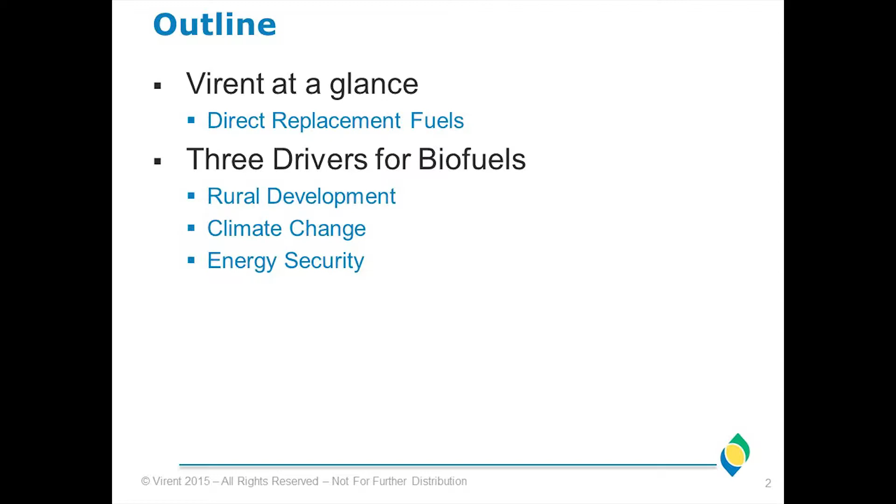Let's see if this works. So the outline for my talk: I just briefly want to give you an overview of what Virent is. It's a company that started in 2002. And then I want to talk about these three market drivers that we have for biofuels, which include rural development, climate change, as well as energy security.

Virent is based upon technology that I co-discovered with Jim Dumesic in the building right across the street here in the Department of Chemical Engineering. As I said, we started the company in 2002. As we were building the company, we were developing technology. We also developed a number of relationships, including relationships with Cargill on the feedstock point of view, Royal Dutch Shell on a product point of view. Honda was interested in what we could do on hydrogen as well as what we could do for generating fuels. And then I'll talk a little bit about work that we're doing with the Coca-Cola companies, more on the chemical side.

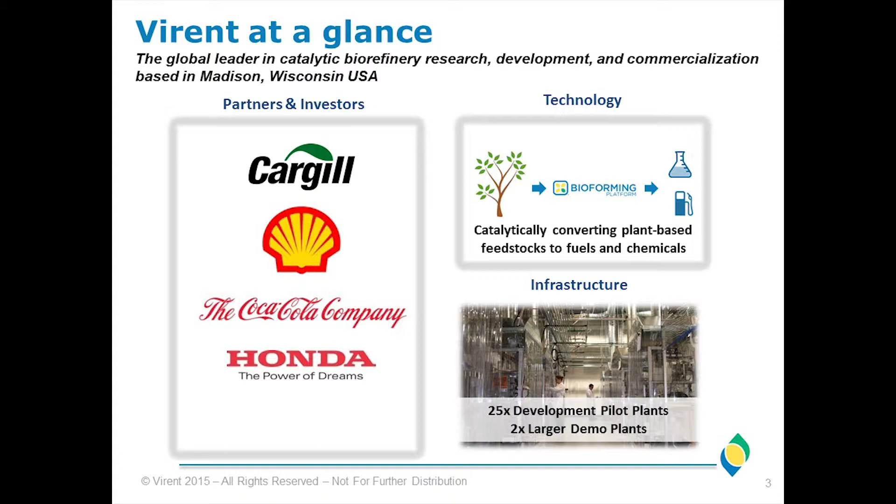We're located here in Madison, Wisconsin. We're over by the airport. We have a facility that's about 65,000 square feet. We have a number of pilot plants. We have what I consider a world-class lab for doing research and development of taking biomass-derived components and turning them into fuels and chemicals. The point I want to bring here is we are generating direct replacement fuels. We have a component that can be blended in to generate gasoline. I'll give you a little bit of a sense of what that is. Diesel as well as jet fuel. Let's see here.

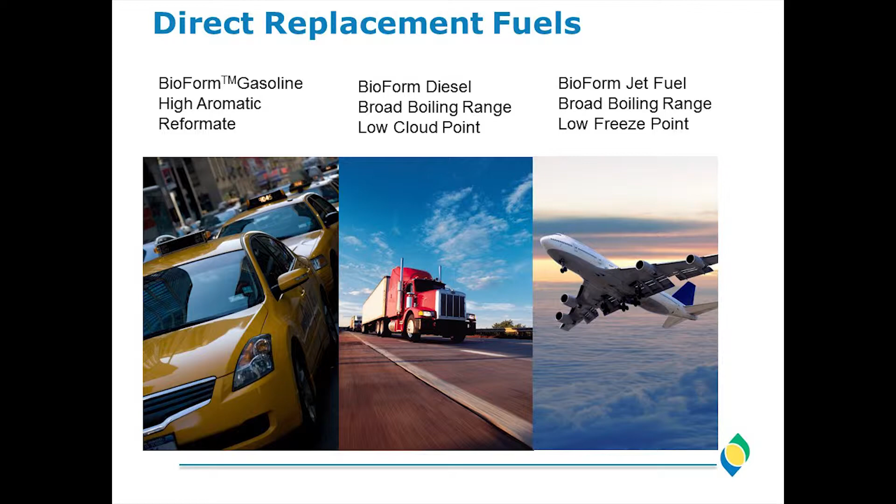Our process can utilize a broad range of feedstocks. We started out developing this using cane sugar as our feedstock, then we worked with corn with the work that we did with Cargill. We since have been doing quite a bit of work looking at different types of biomass, including residual wood waste, corn stover, as well as sugarcane bagasse. And we can run it through our catalytic process.

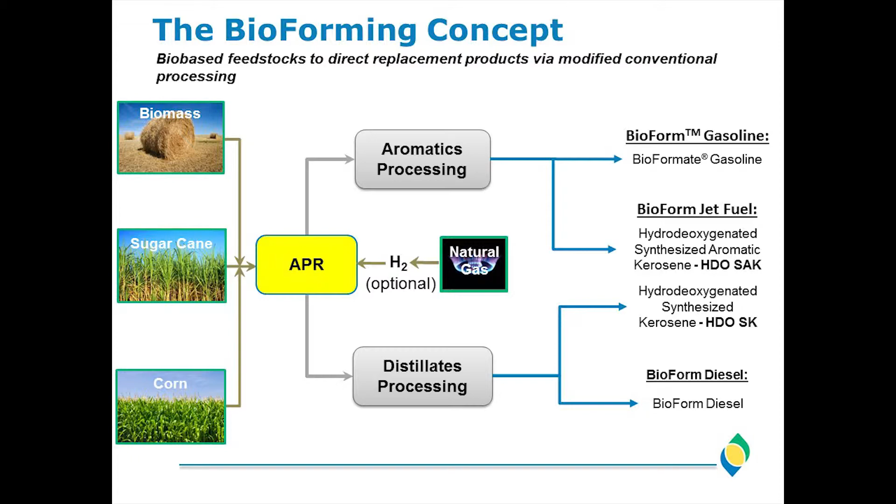The technology we discovered across the street is called aqueous phase reforming. That's the APR process. It can generate hydrogen, or we can bring hydrogen from the outside. So it's a way that we can utilize natural gas within our process. We have a couple of different processes where we can generate the components that you can put into gasoline. We can also put it into chemicals, or we can generate the components you find in jet fuel and diesel.

This just gives you a sense of what we can do on our gasoline. Within the oil refinery business, there's a stream that they blend into gasoline called reformate. We can essentially replicate the composition of that reformate. It's an aromatic-rich type of component. You can then blend it into gasoline to get the performance that you're looking for. The reformate that we generate has an octane of over 100, and it's something you can blend relatively easily into gasoline.

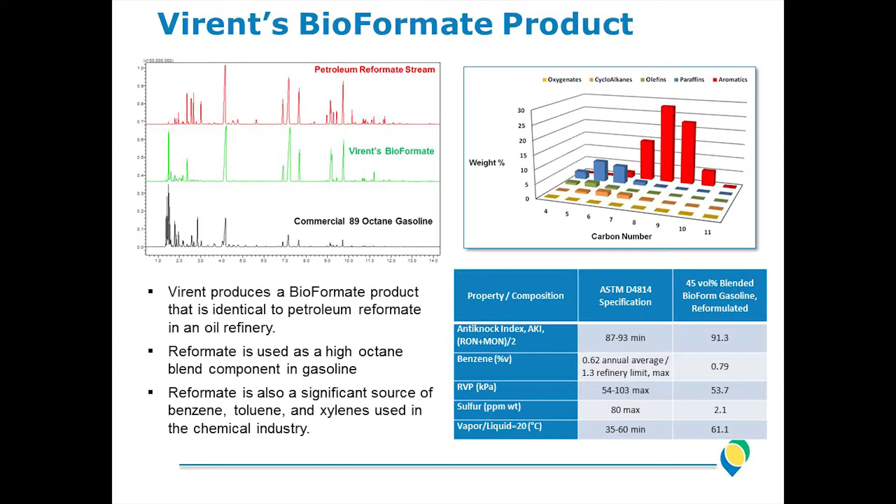Another thing you'll see me talk about is these components here. These are xylenes. These are things that can be separated and provide the components that companies such as Coca-Cola are interested in. We've taken this gasoline. We've been generating it. At Virent, we have been working with our partner Shell. They provide fuel to F1 racing for the Ferrari team. We've done several thousands of gallons for them, and Ferrari is using that fuel as a blend for their racing team here.

We also worked with Shell, where they have done fleet testing of our gasoline, doing no-harms testing. And this is work that was done in Great Britain. We actually have a couple of people here that went to school over here, and they also worked for a company that I worked with, UOP, at the time. They came and worked for the company as well.

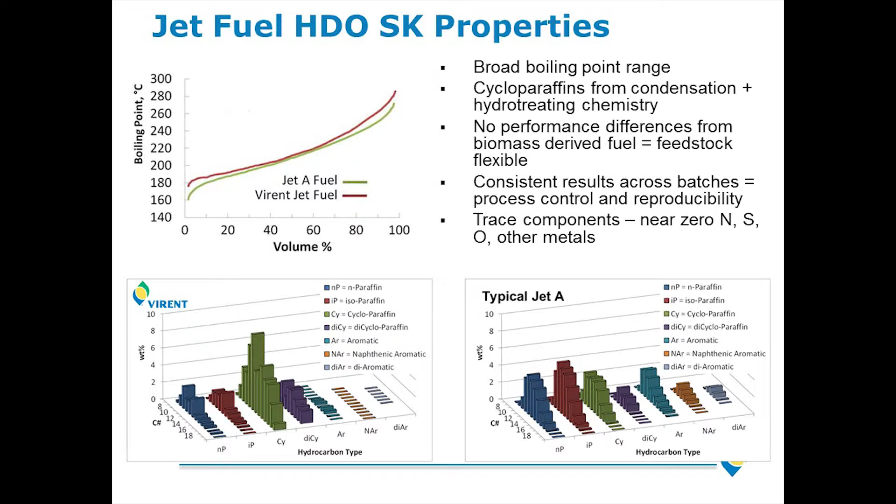The other thing about this is that we have very low contaminant level in here, so when we are working with our jet fuels, we have lower particulates that you would see from the jet fuel, as well as lower NOx, and we're also sulfur free.

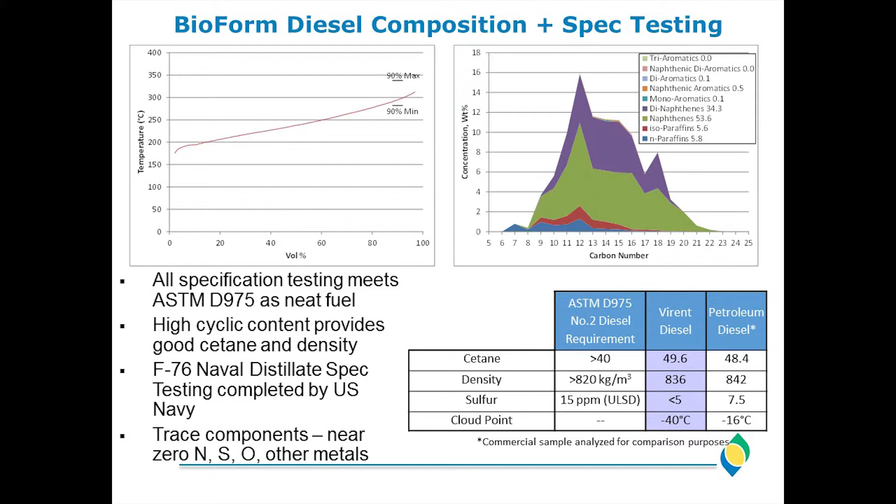On diesel, similar type of a situation: we have a diesel that has a broad range of carbon numbers in it. We have a cetane number close to 50 on it. And again, we have pretty much zero contaminants in it. And so again, it helps on the emissions, particularly from the sulfur point of view.

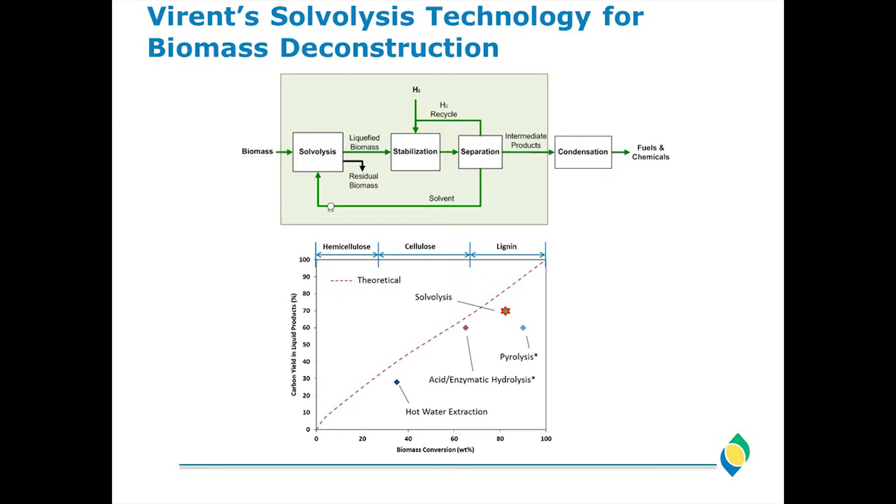So shifting gears here, looking at the markets, as I said, the drivers that we've seen when we first started Virent and when we started working with our different partners were based upon rural development, climate change, as well as energy security. On the rural development side, we were looking at what can you derive from the land, create value for the landowners, and then they can provide it to go to biofuels.

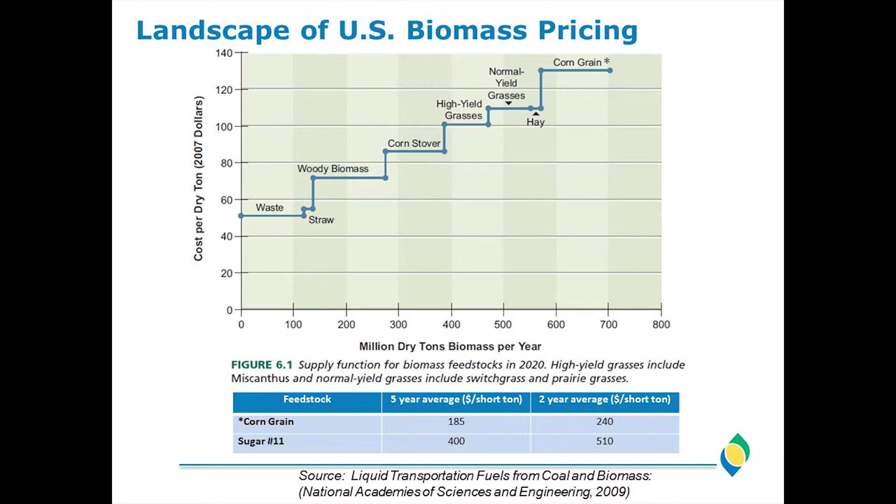And the study is a little bit old, so what we put in here is where we looked at corn grain, the 5-year average, as well as what we're seeing in the near term. And we also have sugar in here. But really what we're trying to say here is there is enough land. You don't have to disrupt the food chain for what you would need for biofuels. And these things are potentials for converting into biofuels.

On the climate change, you just saw in the talks that we had earlier this morning the concern of why we're looking at biofuels. If you have the right feedstocks, you are going to reduce the carbon footprint and reduce the amount of CO2 that's going to be produced. And this is important as far as reducing the amount of CO2 that would be in the atmosphere because of the issues that we are having with increased temperatures around the world, which affects weather patterns and a number of other things.

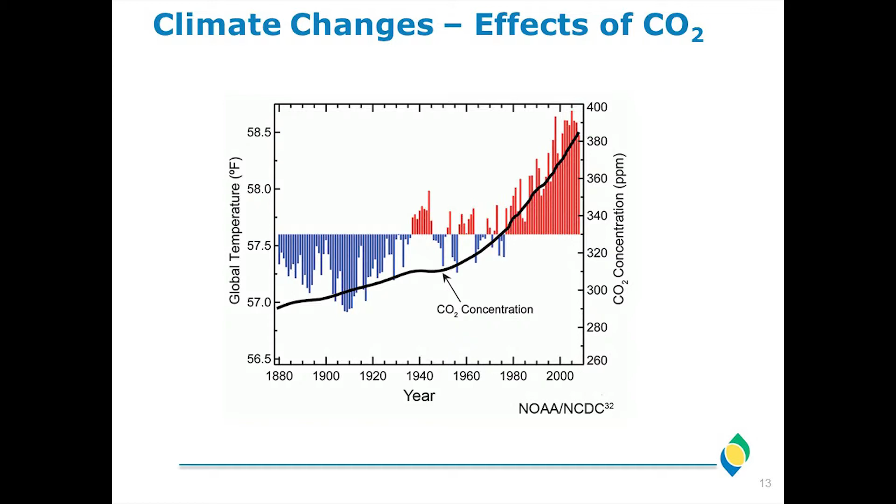So it is an important thing that biofuels, that has been a main driver. And then looking from an energy security point of view, what it's showing here is where we have gotten our products in the past. It started out really from biomass, using wood as a source of fuel, moved to coal, then to oil, then natural gas, and now we're coming back to biomass.

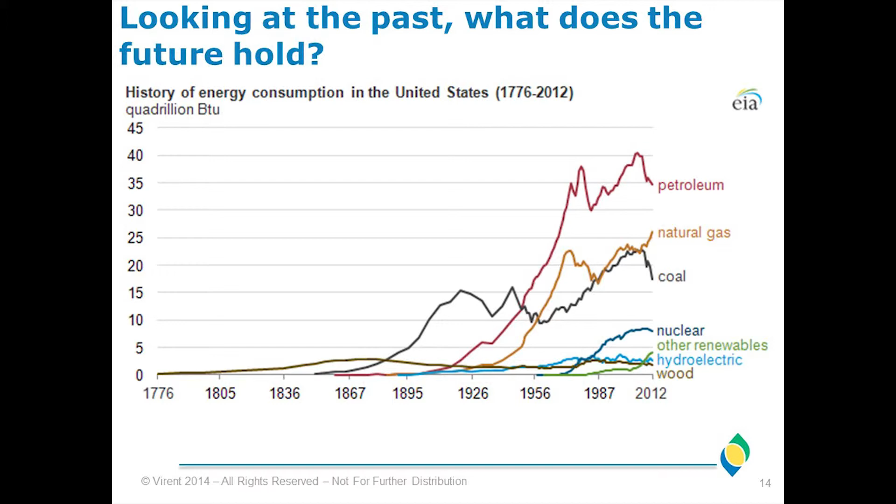And really what it's showing here, and what I wanted to get to, is more of the economic drivers. We had a number of people come to us back in 2006, 2007, when the price of oil was going up. We started seeing there were economic drivers that allow biofuels to make sense.

So what we're showing here, and this is really done on an energy basis of dollars per million BTUs, is comparing the standard fossil fuels, you know, coal, natural gas, oil when it was at $100 a barrel, and then comparing it to what biomass is. And I showed you that it's reasonable to believe biomass could be attained at $75 a ton. And there was a driving force of saying, okay, can we take biomass and end up replacing crude oil?

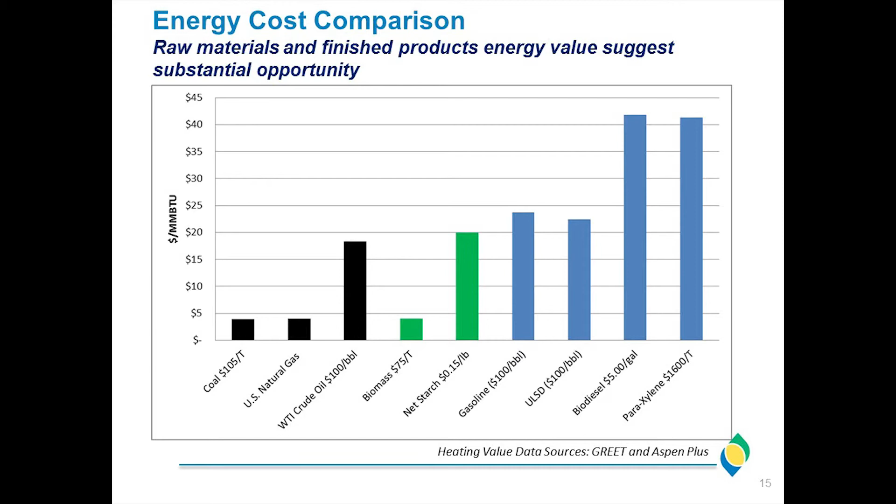Fracking has hurt the economic drivers for biofuels, and the fact that it's being done in areas such as North Dakota mitigates the rural development argument as well as the economic point. So right now biofuels does have impacts on what's going to happen on air quality, but we also need to have economic drivers for doing that.

And there is legislation such as the RFS and what's being done in California that helps, but it's not enough as far as being able to build a plant where you're going to need hundreds of millions of dollars to build that plant.

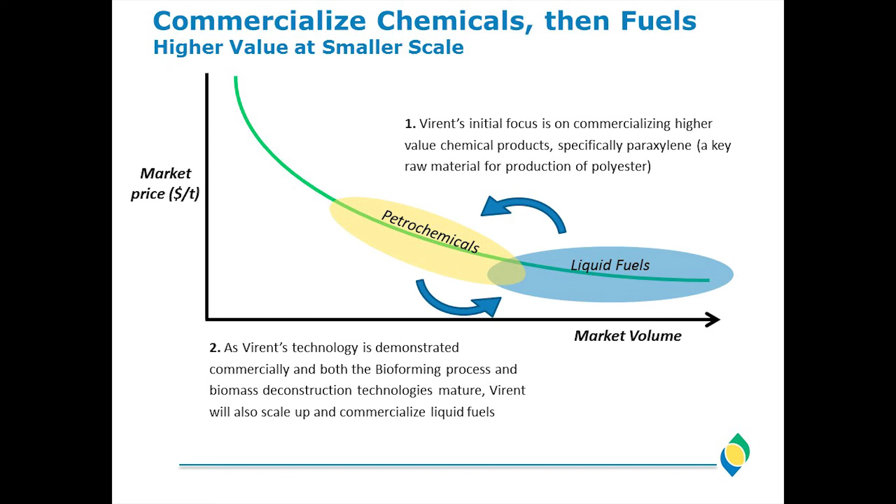So one of the things we've done at Virent is we're looking for other ways that we can utilize the technology. It does turn out that because of the price of fuels and the markets are very large, you can get drivers that way, but if you can start looking at ways of taking the technology and making petrochemicals, which have a lower market volume but a higher price, it's a way of keeping the technology moving forward.

So we have a number of other brand owners that are interested in this, where they are looking at being able to get plastics as well as other types of chemicals derived from biomass. And this is in the fabric industry, the film industry, the packaging industry. So it's a way of mitigating that. Right now we don't have the economic drivers as a fuel, but potentially we can use this for a chemical or for a plastic. And so with that, I'd like to say thank you.